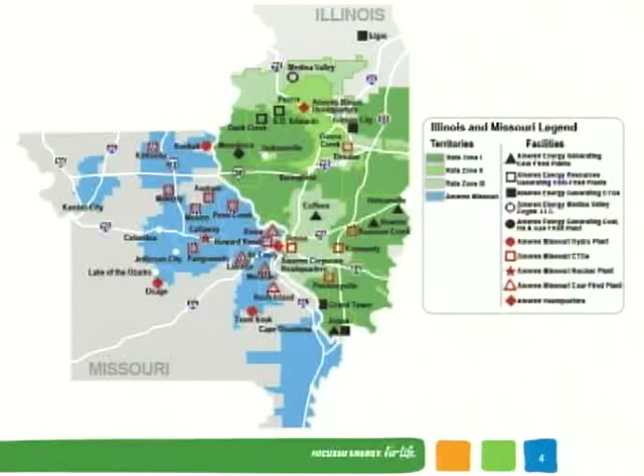We have a nuclear plant, Callaway. We have pump storage at Taum Sauk. We have some run-of-the-river hydro up at Keokuk, and then also Lake of the Ozarks hydro as well.

From our coal plant forecast, we've kind of bottomed out, I guess, as far as SO2 and NOx at this point in time. So overall, you've seen these typical slides of reductions, but benchmarking back to the Clean Air Act amendments of 1990, we've reduced SO2 and NOx by over 85% across the fleet.

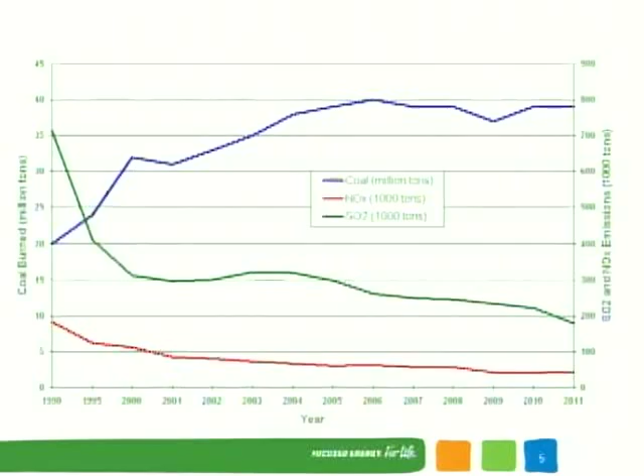At the same time, coal burn has gone up and kind of peaked out in 2006, as most of you probably have those types of profiles, and then kind of leveled out. We're predominantly PRB coal now on all these units.

From a control technology perspective, we've installed quite a bit of SO2 control. So we've retrofitted SO2 controls at 5 units, 2 at Coffeen, 1 at Duck Creek, and 2 at Sioux, and those are all Hitachi absorbers.

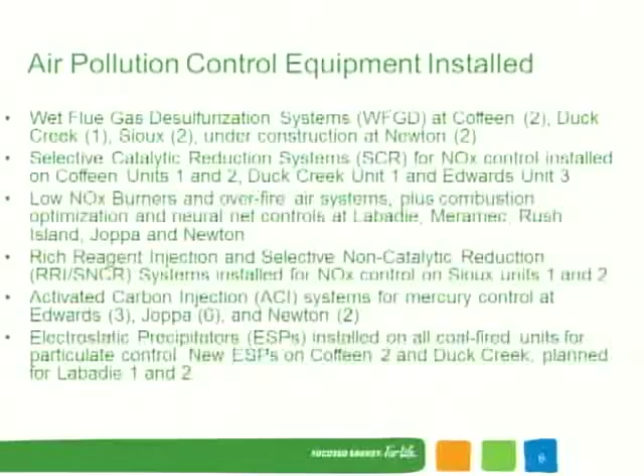A lot of low NOx burners, neural nets, combustion optimization, overfire air systems, and we also have some injection systems, urea, both rich reagent injection and SNCR at Sioux plant.

And then in Illinois, we've installed a number of activated carbon injection systems in 2009 to meet the Illinois mercury control requirement. So when CAMR was vacated, the Illinois mercury rule prevailed, no trading.

We have a control technology requirement that we opted into that's called the multi-pollutant standard, which has both system SO2 and NOx rates, and then a control technology requirement through 2014, and then a 0.008 pounds per gigawatt hour, or 90% control requirement, that begins in 2015.

So we've really been focused on the Illinois fleet on both meeting the technology requirements and more recently on trying to optimize, both minimize cost and optimize performance, of those mercury control systems. And then ESPs everywhere, so no bag houses on our units yet.

We've been able to get by with cold side ESPs. We've replaced a couple on existing units at Coffeen 2 and Duck Creek, done some refurbishments, and then we have some new additions planned for a couple of units at the Labadie facility in Missouri.

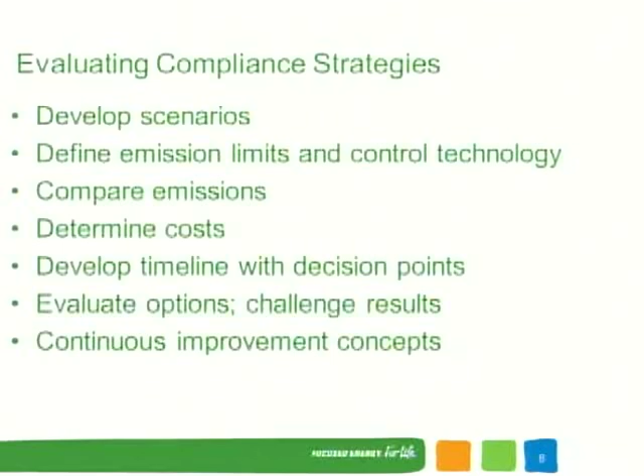One of the key points we tried to build into this process, as you're going through what essentially becomes a financial model, is looking at when decision points occur and then looking at the range of possibilities.

Some of the things we've learned in the last couple of years have been adapted to fracking natural gas prices. I don't think anybody would have predicted 3 or 4 years ago, when we started looking at these studies, what the impact was going to be.

We're at kind of a nexus in the industry. I've been around long enough that I was at the tail end of the coal unit build-out, through the CT build-out in the early 2000s timeframe, and now we're seeing probably one of the bigger shifts, both an opportunity in looking at the fleet, what it's going to be like 20 years down the road.

As well as trying to maintain compliance and provide power. Some of the things we've talked about today, you forget, and I think a couple of the presentations this afternoon mentioned, we are still in the business to generate electricity. So all the stuff we have hanging on the back end makes life interesting. Maybe there's some ulterior markets and alternatives we can take advantage of, but predominantly our business is to provide relatively inexpensive and reliable electric power.

One of the things as far as developing these is looking at what our options are. A couple things: never assume, and never say never. So it was always good to challenge the results. I think over the last few years we've really gotten a dose of that. You really have to explore what the range of possibilities are going to be, and then assign probabilities to that.

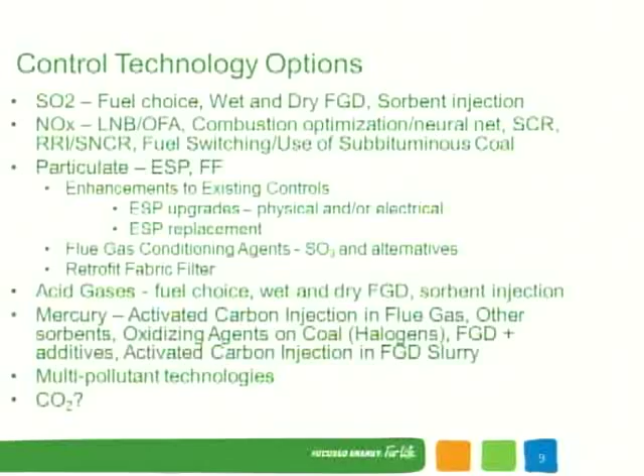For NOx: traditional low NOx burners, over-fire air systems, combustion optimization, neural nets, and use of subbituminous coal for a NOx reduction perspective. For particulates, as I mentioned, we've tried to avoid fabric filters from both a capital and O&M cost perspective, and the fleet is all equipped with ESPs. Almost our entire fleet was originally retrofitted with ESPs in the early 70s, and there are probably about 5 or 6 units that were actually designed with ESPs up front. But we started with retrofits, and that's kind of continued even at this point in time.

Flue gas conditioning agents, as part of the SO2 drop from PRB coal and resistivity in ash, we've used several different flue gas conditioning agents and are looking at alternatives. I put fabric filters on there as an option, but as I mentioned, we haven't had to go to that step yet.

Acid gases: fuel choices, obviously wet and dry FGD and sorbent injection. And mercury, one of the things we've really worked hard on from an O&M cost perspective is trying to minimize the amount of carbon we're injecting in our boilers. There was a requirement in Illinois that if you're burning subbituminous coal, you had to inject 5 pounds of carbon per million ACF gas flow. So we've worked to try to get alternatives where we can do a fuel additive and minimize the amount of carbon we're injecting, while still meeting that emission limitation. Some of that work will also be used to evaluate for our Missouri fleet what we do for control under the MATS rule.

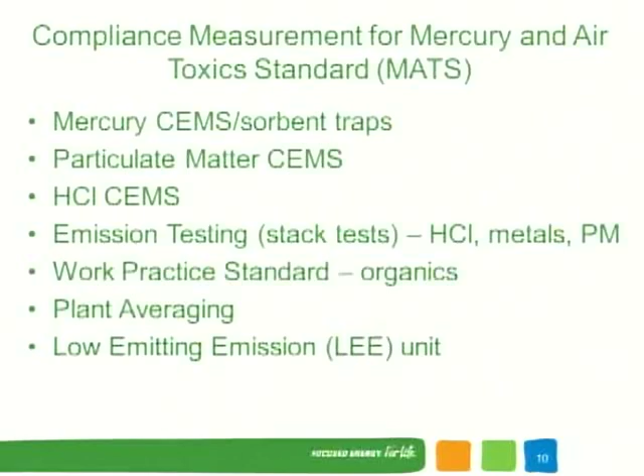From a utility perspective, we do have to comply, and we strive to comply with the regulations, and you have to have some compliance margin - you can't just be at the edge. You have to balance that approach between what compliance is, what the variability will be, and what the margin is. So as part of this time frame, it's not only time to design and install the controls, it's time to ensure they're going to operate at the levels and meet your expectations. Even though the design could be good, actual conditions - it's kind of like the statement on your fuel mileage on the car, actual conditions may or will vary.

So we spent a lot of time working on continuous monitoring, for example installing some PM CEMs to test drive the technology and try to find out what that day-to-day variability is. Same thing with mercury CEMs and sorbent traps. Looking at one of the big challenges for the industry, we think we can get there with PRB coal from an HCl perspective, but can we accurately measure it? At this point there's a question as to whether the technology really is there to make these low-level measurements.

Evaluating emissions testing as an alternative - I think that's going to be a bridge for a lot of us. You're going to have to do those test methods to basically certify and qualify your measurement techniques, but at the same time it could be an alternative for testing. We're going to be doing a lot more testing from a compliance perspective than we have in the past. And then there are work practice standards for organics. We haven't really talked about that too much, but from a boiler performance perspective, that's one of the items that's gotten a lot of discussion in our shop, especially from the performance engineers who are going to have to deal with this and mesh it up with their outage schedules.

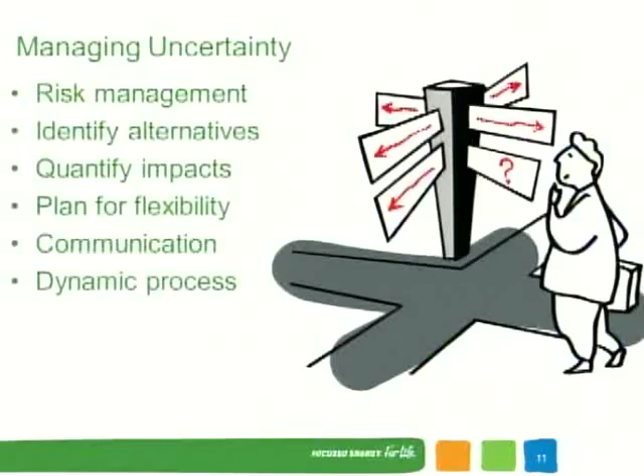And kind of the take home to this is, as I mentioned before, never say never. It's a dynamic process. We've always got to challenge ourselves and question what may happen, and not just assume that we really think it's not going to do this. We kind of have to set these bookends and these error bands and operate within that tolerance, but at the same time be open to be able to adapt to those conditions on a pretty rapid basis.

And that sums up my presentation. Thank you.

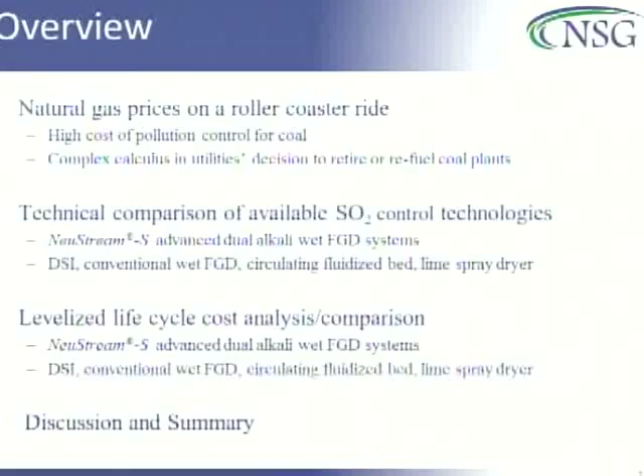It's an advanced dual alkali wet FGD system. But unlike our friends from Canada, we don't build it bigger. We're actually going to show you something that's smaller and a little bit cheaper. And then give you several cost studies that compare all the technologies so that you can have an apples-to-apples comparison.

When we started in this business about 4 years ago, the original vision looked something like this. Apply the best from DoD-derived liquid gas contactor technology, apply good systems engineering, and result in not a 200-foot tall SO2 scrubber, but one that looks about as big as that 6-foot-tall operator there.

The idea, the vision 4 years ago, was to build a scrubber that was 1/10 the volume, much less water usage, much less parasitic power by applying the best chemistries, the best physics, the best systems engineering, instead of being tied to any particular technology, which should result in a 50% savings on CapEx and a similar savings on OpEx.

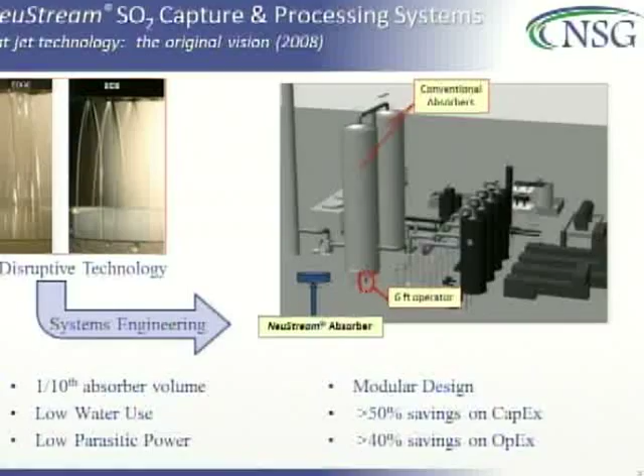Cost comparisons are here. What we've done is built the better mousetrap. We've taken the best chemistry and the most efficient gas-liquid contactor and applied it to demonstrate SO2 control that's in production today: 97% plus capture for both low and high sulfur coals, with high reliability using proven technologies that use very low parasitic power, very low water consumption.

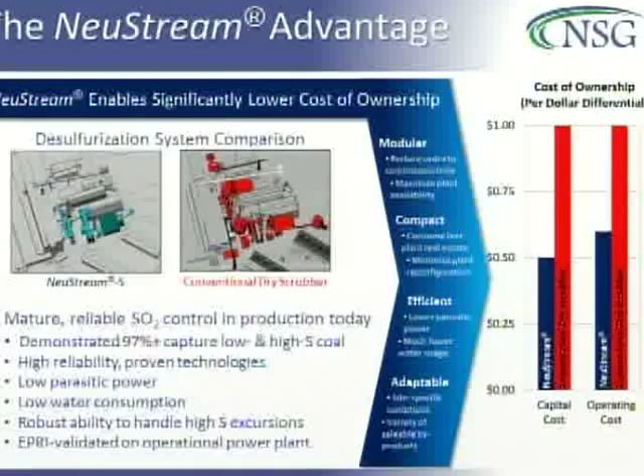I'll show you a few test results as we've gone through this. Everybody knows dual alkali, but nobody really knows dual alkali. It's been around since the 80s. There were some problems that were worked out then, but it kind of went out of favor.

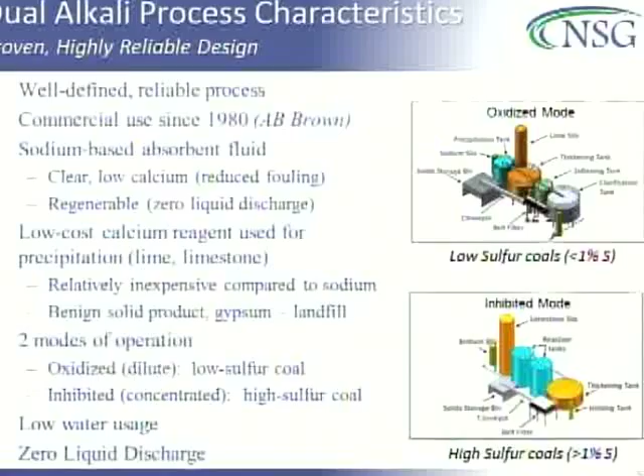What we're using is the aggressive atom of sodium to grab the sulfur dioxide quickly in our highly efficient wet scrubber design, using our flat jet technology. Then we swap it out with the low-cost calcium reagent on the back end, either using lime or limestone depending on sulfur levels, to produce gypsum as your only waste product.

This system can operate in either high sulfur or low sulfur, inhibited or oxidized mode. You have to choose—we can't build a system that handles 0 to 5% sulfur. But depending on your fuel mix, we can build a system that will handle either. It has very low water usage and zero liquid discharge.

What you see here is the key to the technology, the Jetbox. It scales linearly, so we don't have to worry about efficiency losses. We don't have to build 200-foot tall towers like the calcium slurry systems do. If you need more gas flow, we build more scrubber boxes, and it scales up linearly. The only thing required for continued high performance is good gas flow through the Jetbox.

I spent 28 years doing R&D in the Air Force, and this kind of computational fluid dynamics isn't that hard to get right—we can do it today. We can guarantee good flow through the Jetbox and give you uniform flue gas distribution that gives great capture.

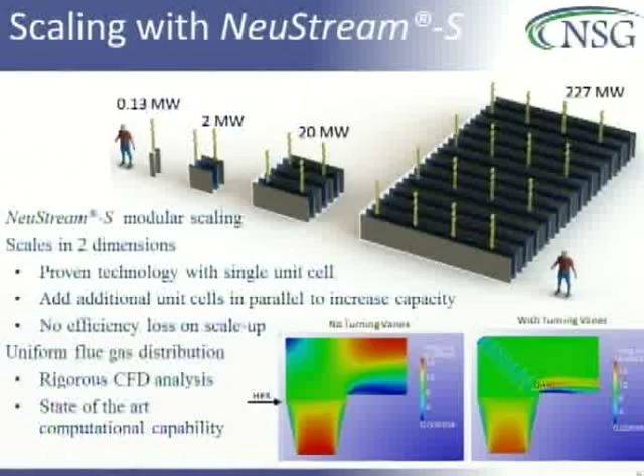When you think of the sizes involved here compared to what conventional wet FGD asks you to do, you immediately see savings that can come—much less manufacturing of the working components, smaller footprints, smaller sizes of hardware, and everything scales down. Parasitic power goes down if you're not pumping your sorbent fluid 200 feet into the air. With some other systems engineering approaches, we've managed to reduce water usage as well.

This scaled up very quickly with our customer, Colorado Springs Utilities. This is the 20 megawatt scrubber—to give you some scale, that entire scrubber is about 10 feet on a side as a cube. The rest is just ducting to take the slipstream, but it's a very small footprint.

It followed rigorous testing at the bench top and with slipstreams of 0.13 and 2 megawatt size. The 20 megawatt pilot ran for about 5,200 hours continuously, including 3,300 hours with the back-end sorbent processing system. We flow the sodium reagent through, take out the sulfur, push it to the back end, and swap out the sodium with calcium to produce this dry gypsum byproduct.

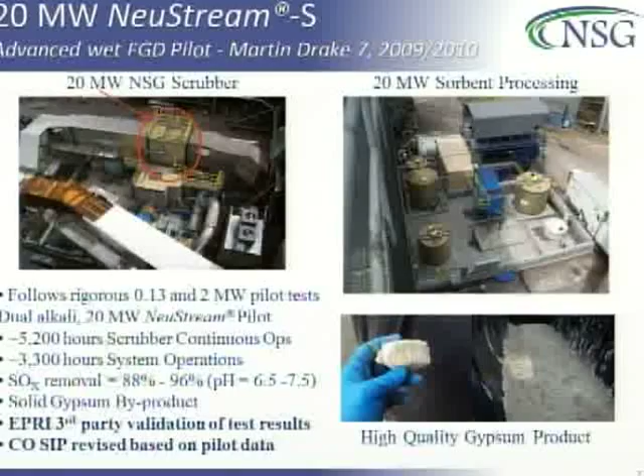We're pretty far in Colorado Springs from the nearest drywall plant—it's a long way to Sweetwater, Texas. So this is a landfill product in Colorado Springs. But if you're fortunate enough to be next to a drywall plant, this is drywall quality gypsum.

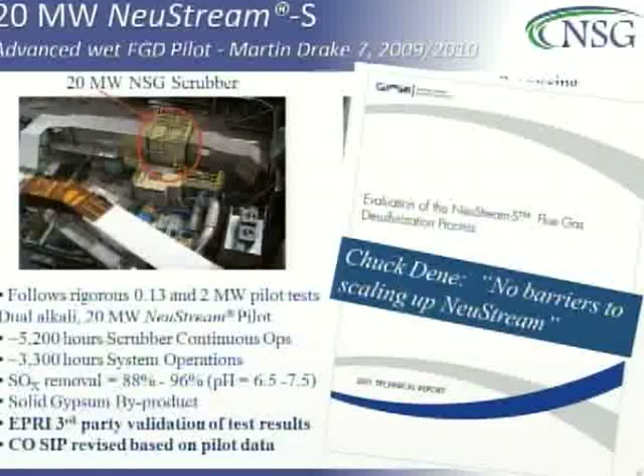The SOx removal was demonstrated at various removal levels, as shown with the pH range also shown there. We had the fortune of EPRI studying our project and issuing a report. I'm not an EPRI member, NSG's not an EPRI member, so I can't give you this report, but if you're an EPRI member, you can get it. If you know Chuck Dene, you understand he doesn't pass out compliments easily, but he said there are no barriers to scaling up.

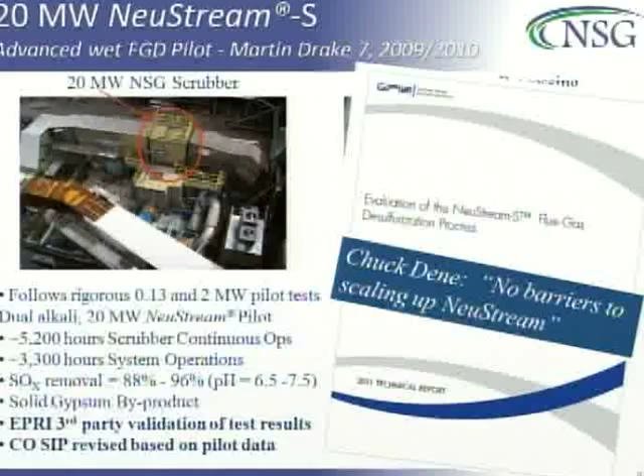This resulted in the Colorado SIP being revised from being specific to lime spray dryers to include the Neumann Systems Group technology as well.

We've also demonstrated this on higher sulfur coals at an eastern power plant in Pennsylvania, showing very high sulfur dioxide removal rates along with acid gas and mercury removal rates. These are all post-baghouse mercury removal measurements, so the baghouse is doing most of the work. We're scrubbing post-baghouse and not interfering with the natural oxidation of mercury through this process, resulting in very, very low re-emission rates.

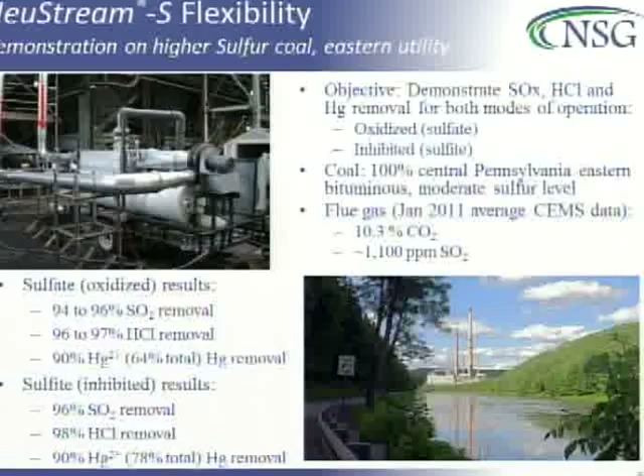To compare with lime spray dryers, we've got some performance measures here. It's late, so I'm going to give you these slides as you leave, but let's focus on a few.

Parasitic power is half that of a lime spray dryer. The wet process of NeuStream uses half as much water as the dry process of a lime spray dryer. We don't have time to go into that, it would take at least 2 beers.

Our primary consumption is in lime, and it's roughly the same amount of lime consumption as a lime spray dryer. There's a little bit of trona makeup on the back end because we lose a little bit of the sodium out with the dry cake, but it's a small requirement.

One of the interesting systems engineering improvements we've made on the dual alkali system is an active heat management system, and that leads very strongly to the low water usage. We take the heat out on the front end, don't flash off so much of our liquid, and then reheat on the back end so that we don't have problems with acid gases condensing in the stack. No problem with the fly ash as well. The gypsum comes out as a saleable byproduct or a landfillable byproduct.

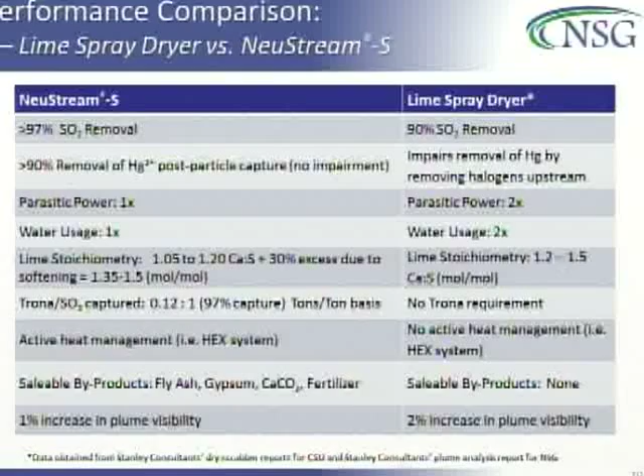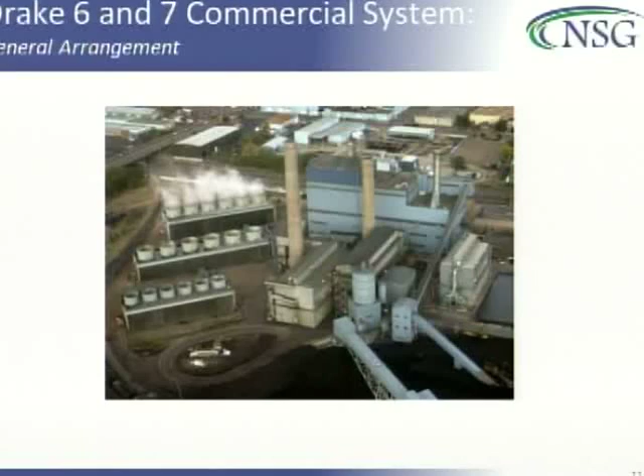This is the Drake system that we see in Colorado Springs. This is the epitome of the constrained space. We've got an interstate highway that wraps on 2 sides and a downtown for a city of 500,000 that wraps on the other 2 sides. When Colorado Springs Utilities first looked at other alternatives for flue gas desulfurization, they just wouldn't fit.

So if we look at the model of it, you see where the two capture scrubber systems fit in for Drake 6 and Drake 7, 2 boilers, and then a single sorbent processing building to make the gypsum and recycle the sodium.

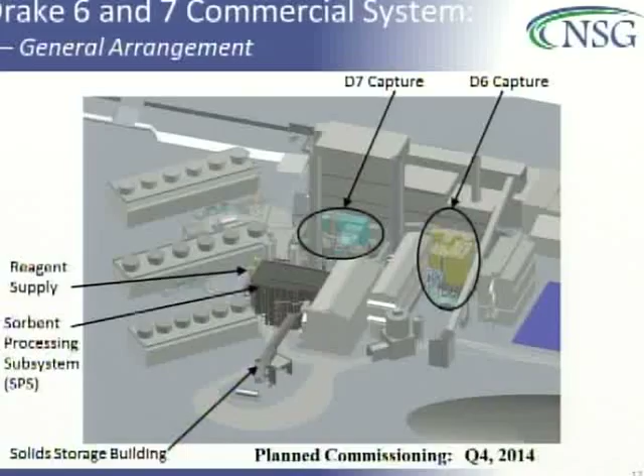Compared with other flue gas desulfurization technologies, we've got some numbers up here. Most impressive is the 10x reduction in volume compared to wet FGD, much lower parasitic power usage, about 4 times lower water usage, and the ability to do most of the fabrication off-site. The Jetboxes are built in our factory, and they're so small that for a 200 megawatt system, they would easily fit in this room and not go above the height where you're standing. So small hardware, truckable from the factory, so assembly on site is a much easier, faster operation.

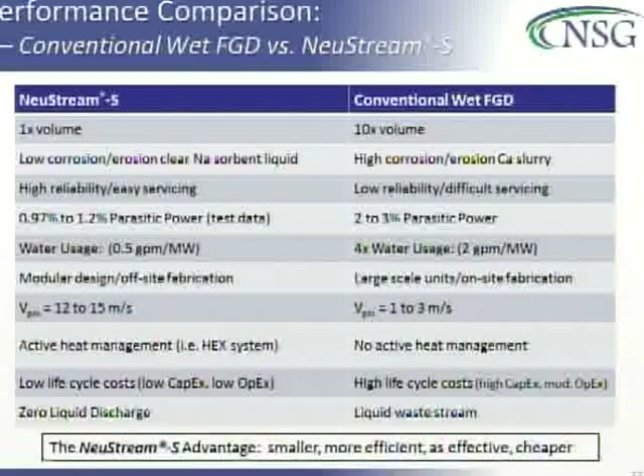We've got one customer in the Midwest who's faced with 2% unemployment in their neighborhood. Now, I don't live in a state with 2% unemployment, so it's hard for me to understand what that's like. But finding qualified construction workers in some parts of this country is still a difficult task. So it's zero liquid discharge versus a liquid waste stream with conventional wet FGD.

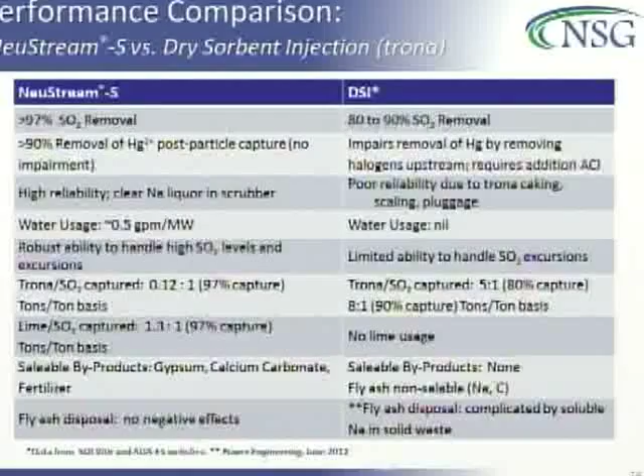When we look at dry sorbent injection, the picture changes somewhat. Here with the NeuStream, we're looking at a much higher maximum performance level if that's what you need. Good removal of the oxidized mercury versus impairment of mercury removal with DSI. DSI can overcome that with the addition of activated carbon injection, of course. We've also got a very high reliability system.

We're spraying a clear sodium liquor in our scrubber. We don't have clogging, we don't have pluggage. It's not a problem that affects this system. And as we talked about before, low water usage versus no water usage for DSI.

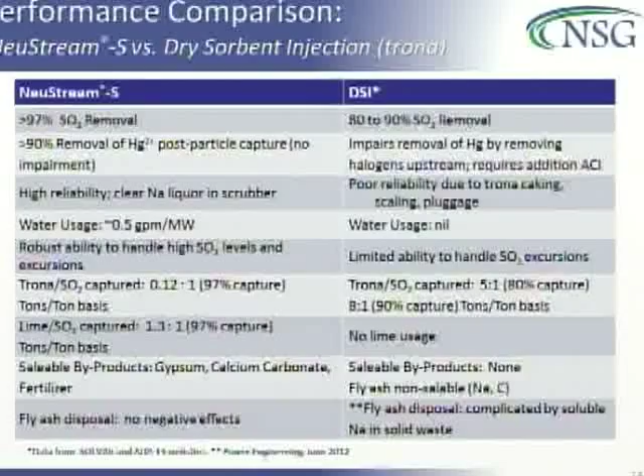A lot more comparisons to go through, but it's late and I'm going to skip to the end. What I'd like to do is show you a few cost studies of the comparative technologies. The next 4 charts are going to have basically the same structure as this one, so we'll take a little bit of time and walk you through this one.

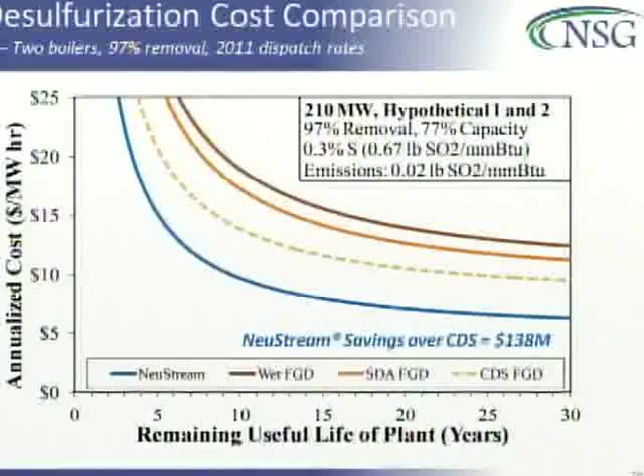If you raise the removal rate on that same plant with the same sulfur to 97% removal, then the DSI drops out because it just can't make that kind of removal rate. The competition becomes between NeuStream and circulating fluidized bed, shown in the dashed yellow line. Over 30 years of operation with this sort of plant, we're talking about over $100 million in combined levelized cost savings, a combination of CapEx and OpEx.

When you go to a larger plant, again with moderately higher sulfur coal, you see this sort of competition. It gets much closer, but the low-cost option again turns out to be NeuStream, and it breaks even with DSI after just 5 years. So it's always: do you buy your car or lease your car? Do you want to pay me now or pay me later?

And it really depends on your individual case what's going to make the most sense for you. So if you're going to limp a plant through for the next 5 years with a 30% dispatch rate, then there's a clear best option for you, and it's not my product. We'd be happy to run our cost models for your particular case and give you some demonstration of what we believe the costs to be. These costs for the competing systems come from the EPA model that Sargent and Lundy has published, and our costs are our internal numbers based on our own construction of the Colorado Springs Utilities plant and estimates on other size plants.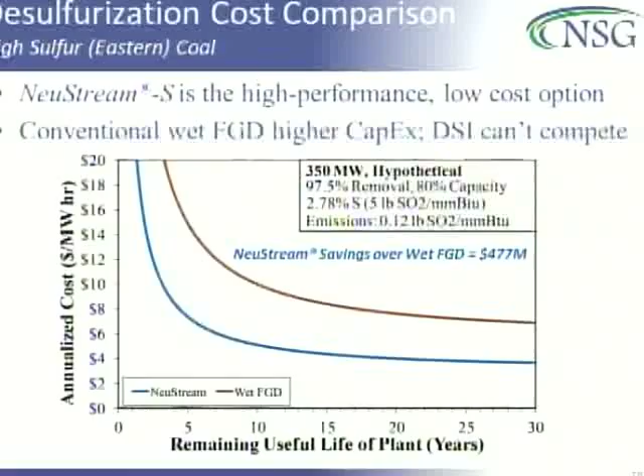So it's the last one, the last chart. You get to go home and catch your airplane. My experience with 28 years of active duty in the Air Force: catch the airplane from behind, don't step in front of it. You'll be in a lot better shape.

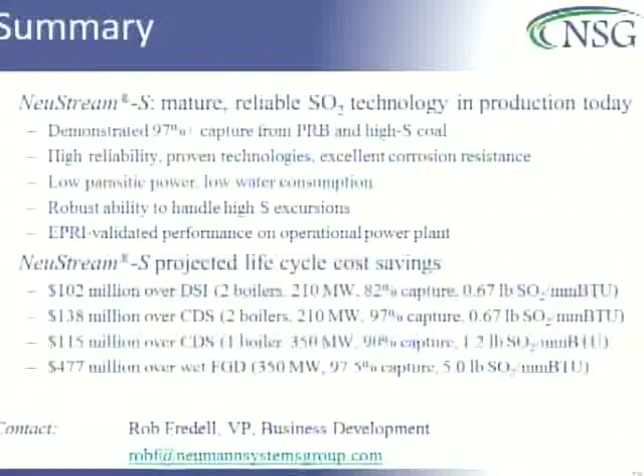We've demonstrated high capture from PRB and from high sulfur coal. We've got high reliability with an adaptation of several proven technologies. NeuStream gives you low parasitic power, low water consumption, zero liquid discharge, and the ability to handle high sulfur excursions. We've got validated performance—we're producing our first commercial scale installation right now. And given the right conditions, we can save you some money. So I'll open it up for questions now, and I thank you for your attention.

I'm going to ask a question. It turns out we looked at dual alkali systems back in the 70s, sodium systems no less, and we found a very serious problem with oxidation of the sulfite to sulfate, requiring a lot of makeup. Could you talk about that a little bit?

Well, I'm not a chemist, but I have one in the audience, so Jake—if I get this wrong, stand up for me. What we found is you can't swap out in the middle. You have to either be fully in sulfate mode or fully in sulfite mode. We oxidize with low sulfur coals to stay fully in sulfate mode, and we inhibit that reaction for higher sulfur coals to stay fully in sulfite mode. It's kind of like anything else—you've got to make a decision on which one you want to be on. And there's a tipping point. We can tweak that tipping point depending on your fuel requirements, but it's something to be avoided to be in the middle. You don't want to be in mixed mode.